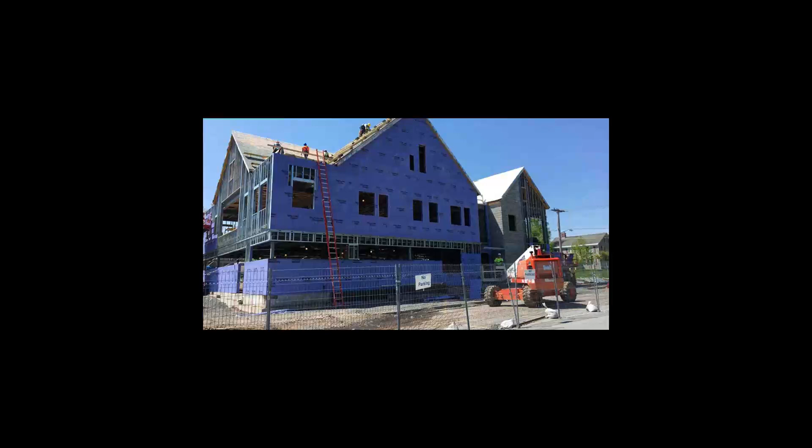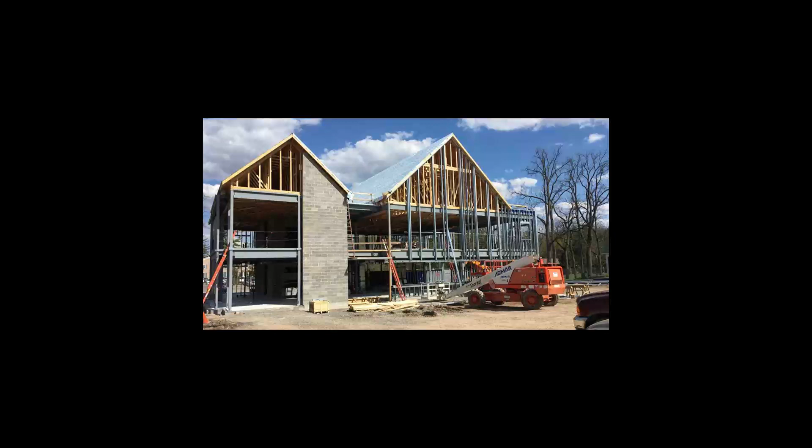Therefore, before we hear from our judges who will each present a medal award, it's my privilege to present the Special Recognition Award of Merit to the Johnson Center for Health and Wellness at Hamilton College, located in Clinton, New York. The 13,000 square foot, 2-story Johnson Center for Health and Wellness features a variety of structural systems. The 3 steeply pitched roof gables and slate shingles are supported by prefabricated wood trusses spanning between structural steel support lines. The second floor and a portion of the first floor are supported by conventional concrete slab-on-deck construction with steel beams and columns.

The selection of the lateral load-resisting system was important because of the architectural desire for the system to not inhibit the space in any way. It was decided that 3 individual shear towers would encompass the 2 stair shafts and the single elevator shaft. However, all the shafts were located towards the northern end of the building, which is not ideal for overall building torsional rotation during a windstorm or seismic event. The lateral load-resisting system had to be rigid enough to prevent excessive building torsion, as well as be a cost-effective solution. Therefore, the design team settled on CMU shear walls to surround the 2 stairs and single elevator. The system was supplemented by steel moment frames at the southern end of the building.

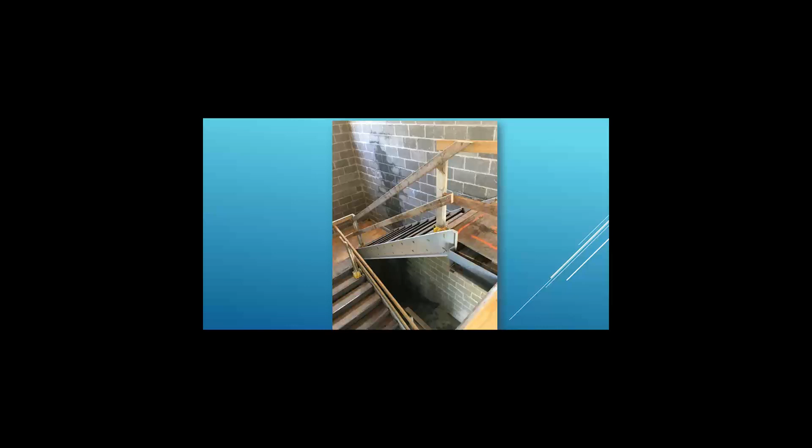The basement level houses the large mechanical units necessary to serve the building. Because of a high water table and the constant presence of underground water flow at the site, a dedicated under-slab drainage system was needed. The general contractor, Gaetano Construction Corporation, encountered an enormous amount of water flow on the site. Keeping the construction site and the building's basement dry was an achievement in itself.

The building is comprised of a shared waiting room, reception, and conference staff room that serves both the clinical suite on the first floor and counseling offices, group rooms, sunroom, and biofeedback space on the second floor. Within the clinical suite are staff offices, exam rooms, nurses station, medication room and lab, and the student-run EMT service. The first floor features radiant heating within the floor slab.

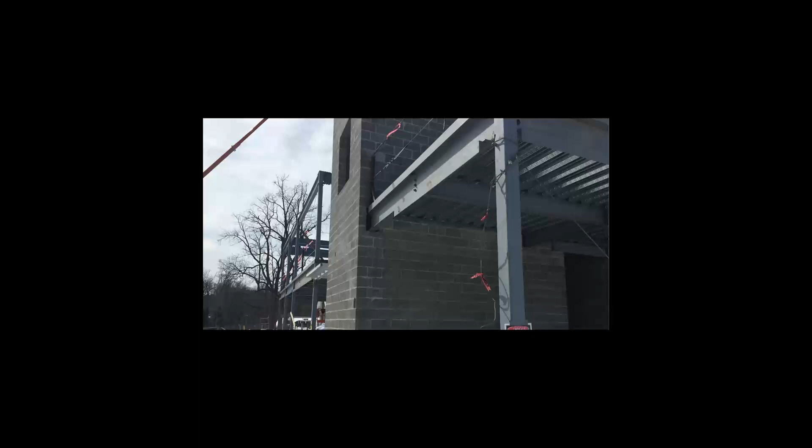The owner requested that the initial design of the building would allow for a future second story and roof gable to be built upon the southernmost part of the structure above what was originally to be a low roof. The decision on expansion was expected to come several years after the project was completed. However, much to the design team's surprise, the owner elected to proceed with the future expansion while the design drawings for the original structure were still being completed.

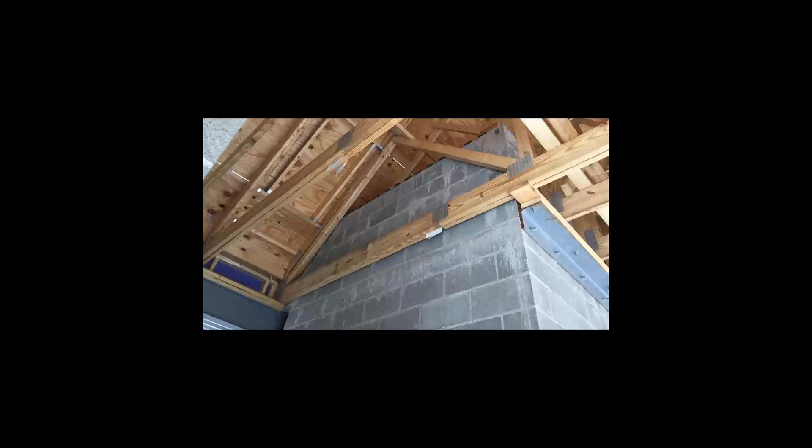This could have resulted in a significant amount of added design and detail work that may have impacted architectural aesthetic had the lateral load resisting system not been as robust as the CMU shear walls. The design team was easily able to absorb the additional load from the addition through an increase in steel reinforcement.

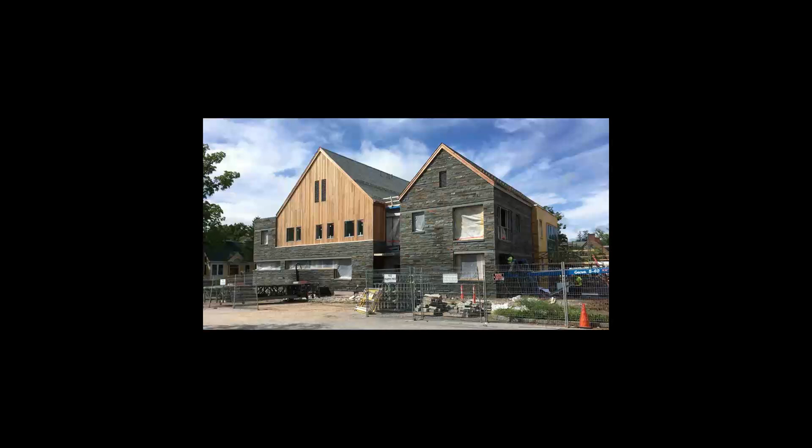The exterior facade of the building stands out as a shining example of the beauty that can be achieved with well-executed stone masonry. The hand-placed stone facade used a back bed of mortar to achieve a dry-laid look without the appearance of mortar joints. A continuous horizontal bluestone band above the typical window heads visually ties into the stone rain screen on the north facade. The Johnson Center for Health and Wellness is the archetype of a project that boasts the perfect blend of brawn and beauty achievable with masonry construction.

And at this time, I'd like to congratulate the owner and the design team on an outstanding project. The project owner is Hamilton College. Project architect is Chang O'Brien Architects. Project engineer is Ryan Biggs, Clark Davis Engineering and Surveying. General contractor was Charles A. Gaetano Construction Corporation. Masonry contractor, Paragon Masonry. The masonry producer, Rosselli Northern. The testing company and special inspector, both Atlantic Testing Laboratories, and the stone installer was Schneid Construction Company. Again, congratulations to all involved in this outstanding project.

Now, I'm going to move things along here, and it's time to turn things over to Mr. Michael Bosak to present our Bronze Award winner. So, Michael, if you would take it away, please, and just give me the signal when you want me to change slides. All right, thank you, Nick.

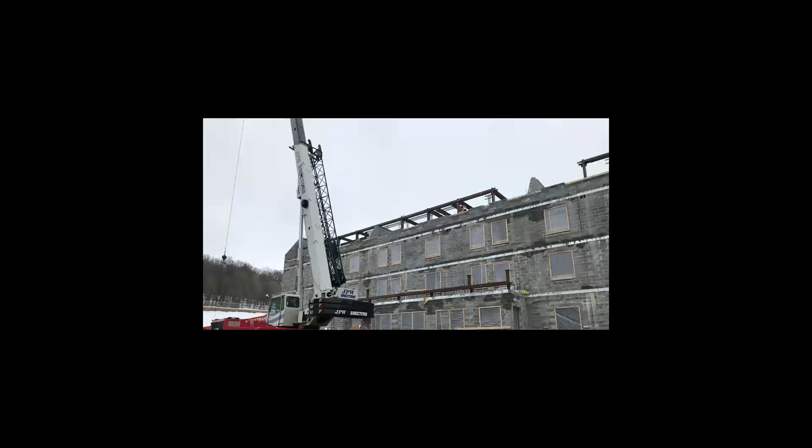I'm pleased to award the ACI Central New York Chapter Bronze Award for Burke Hall and Pinchin Residence Halls at Colgate University. Next slide, Nick. Okay. Congratulations to the team at Alliance Masonry, Jason Miner with Colgate University, for another award-winning project at Colgate University.

The pair of residence halls, Burke Hall and Pinchin Hall at Colgate University in Hamilton, New York, each house 106 students in double rooms. They occupy a prominent site at the southern edge of Colgate's Hilltop campus, inserted between existing residence halls. Negotiating a steep change in grade, each building offers two sets of entrances, a lobby to the north and a first floor commons that opens up to the new quad.

The materials, which were locally quarried bluestone and cast stone, accent the facade detailing. Most of the 45,000 CMU were installed in wintertime, which required additional quality control and extensive protection, not to mention the 2,200 pieces of cast stone, which created some rigging and installation challenges to overcome. Burke and Pinchin Halls achieved LEED Gold certification.

The 30,000 square foot stone exterior of these two buildings was sourced locally from Pennsylvania, which reflects Colgate's historic architecture, representing the character of the 200-year-old institution. You can change the slides, Nick. There's some more views of the winter construction. Another slide. That again shows the complexity of wintertime construction and trying to keep things flowing on the hills of Colgate University.

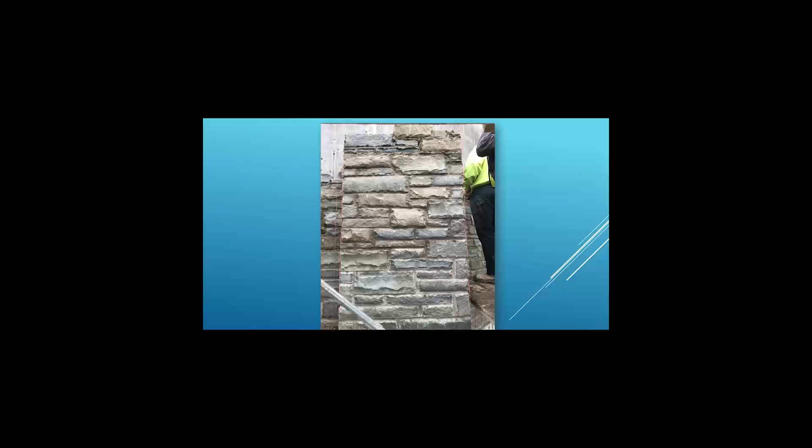Silver Award. Congratulations again to Brett Sherman with Alliance Masonry, Jason Miner of Colgate University, architects Robert A.M. Stern; the engineer was Thornton Tomasetti. The general contractor was Hayner Hoyt Corp. The masonry contractor, like I said, was Alliance Masonry. And the masonry producer was Oneonta Block Company. Congratulations again, guys, on a good job. That's it, Nick. Thank you.

All right. Thank you very much. And now, I know the suspense is killing everyone. To present the Gold Award, Mr. James Deloisio. Jim, it's all yours. Take it away.

Okay, thanks, Nick. And I gotta say, the three judges, and it was fun to be a judge, even though we couldn't actually go to the buildings. And you know, Nick promised us lunch, and he never bought us lunch or anything.

But the three judges were not of the same mind, I got to say, just full disclosure. We had some good, robust discussions about first, second, and third place, because all three projects were really quite spectacular. The first two projects, you saw the visual appeal of the ashlar masonry and the brick and the arches was really compelling. So it's tough. It's tough being a judge with three really nice buildings.

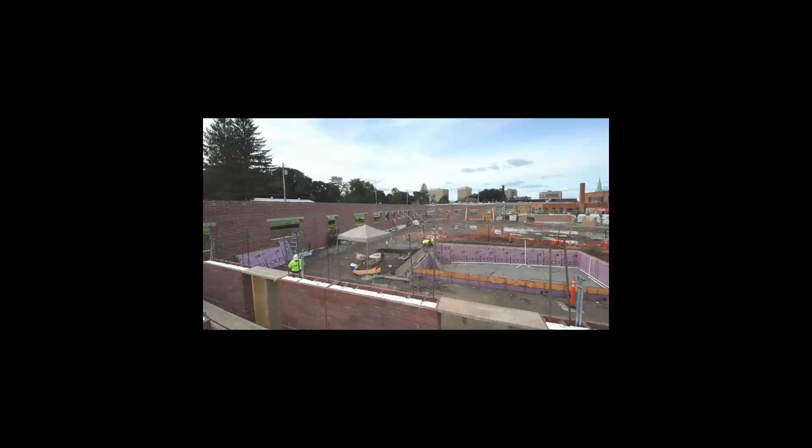Okay, Nick. Next slide, please. It's coming. There's a little bit of a delay. Sorry, Jim. That's okay. I'll be patient.

First of all, the design team laid out the building with an automatic masonry layout program called Masonry IQ. Now, I had never heard of Masonry IQ before, and that's one of the benefits of being a judge. You get to read up and learn about stuff. Masonry IQ is now a Revit add-on program that works with Revit.

What it does is it takes the modularity of the masonry units and optimizes the layout and helps you easily modify the dimensions. Don't you wish that you could have just shaved 3 or 4 inches off of a building so that the modular units of masonry could have come out well? Well, Masonry IQ really helps you do that. So check it out.

It was like a 2-minute long free YouTube video that shows what it's about. It's really cool. That's the way to design and lay out masonry buildings in the 21st century, right? The other thing is, right off the get-go, it was a special building.

It won a place in my heart because it used single web blocks, ASTM C90 concrete masonry unit blocks for the foundation walls. Single web blocks. Now, you don't need 3 webs on a block. You don't even need 2 webs. You can use 1 web. It's easier to install because you can install them around the reinforcing. There's less obstacles. You can let the grout flow better.

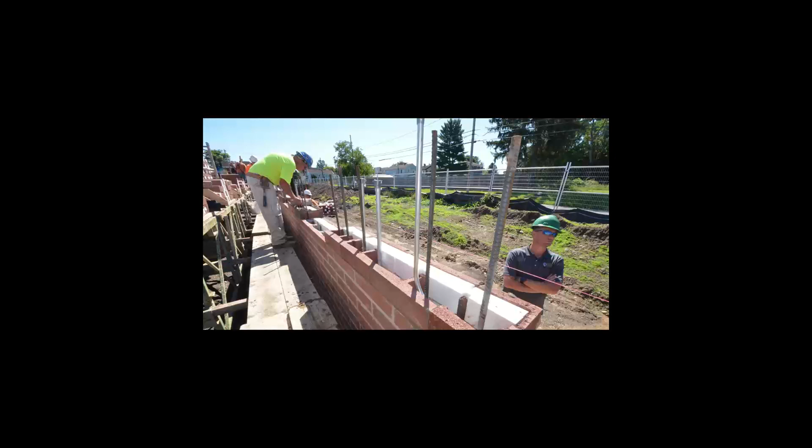And then we got to the above grade walls. And what they did is they used proprietary high R H-spec brick units. You can see the brick units with the brick webs connecting the inside and the outside face shells. And you can see continuous white insulation that looks like EPS to me. So it's decent insulation. And then you've got the vertical reinforcing. And so you put in the grout and you've got a solid masonry wall. And you're basically done. It's a one and done kind of a thing.

So they've got 12-inch thick insulated units, and they use lightweight grout with insulation. And the actual units have an overall R value. The word effective R value is misused, but in this case, you truly get an R 12.1 and R 15.5. But of course, we're talking U factor. It's the thermal flow. A U of 0.082 and a U of 0.065. We got to eventually learn to start talking U factors.

I'm just saying. So those U factors of the entire masonry assembly were code compliant and high thermal walls. So you had the conductive resistance in the wall from the get-go as soon as you built it, and you have an inherent air barrier as well. We've seen the plastic and the spray material and different options for air barriers. A solid grouted masonry wall is an inherent air barrier. So you've got the conductive resistance, the convective resistance, and the thermal mass all working for you to have a high performance thermal envelope. Plus, it's the structure.

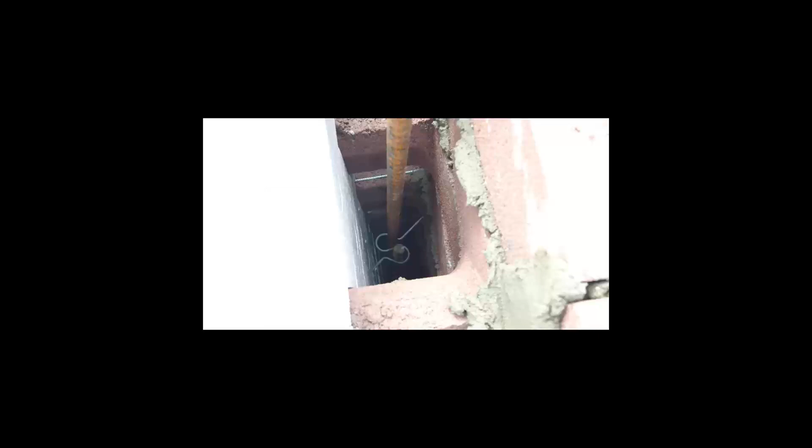So as a structural engineer that knows building envelope performance, I like this building because these walls do both of those things. And there's more. They do that and more. I sound like a Ronco salesperson, but there's a lot of things that these walls do. Let's go into the next slide. I just like this slide because those rebars are tied in nicely and they're not going to go anyplace. Nice open, clean space to put in grout.

So the walls are structural. They're thermal envelope. And they also have the interior and the exterior finishes. And of course, masonry is inherently fire resistant. And if you get the electrical, plumbing and mechanical trades in early enough, and you have to get them in to coordinate anyway, you can put the conduits and the pipes in the walls before the walls are built and the grout is placed. So by the time the grout is placed, you've got an all-in-one wall system. Okay, let's go to the next slide, Nick.

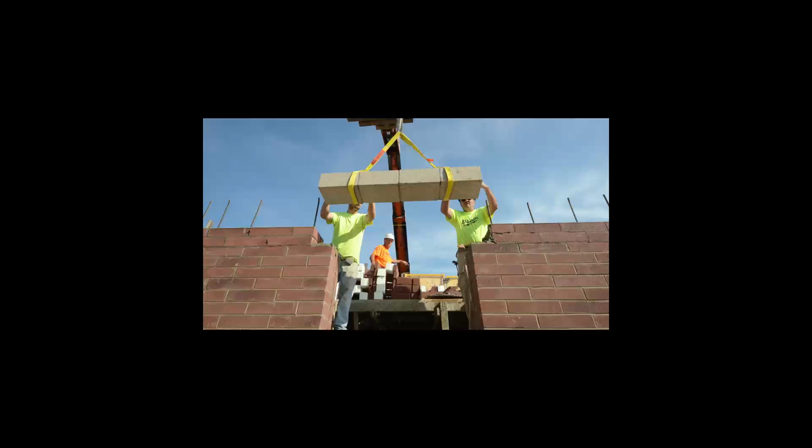And the lintels were pre-designed, prefabricated, reinforced with carbon fiber strips, and then set into place, and then rebar put in, and grout put in. Why would we use steel lintels that you have to flash and make sure are galvanized or corrosion protected, and have different thermal properties in the masonry, when masonry works as a fine lintel system itself? So let's go to the next slide.

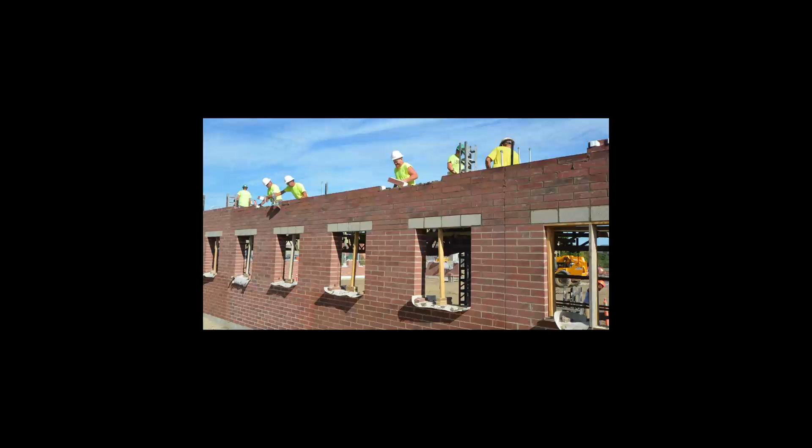And I like this. You got the masons. Look at the smile on the mason's face, right? The production was very good on these walls, and once they got the masonry units installed, all they had to do was cleaning of the faces, and you've got the finished wall. There was a lesson learned about keeping up with the cleaning, because every single face on these wall systems was exposed.

The exterior, so you can see the brick appearance on the outside. The edges of the windows and the doors were brick. And also, as you'll see in a couple of slides, the interiors were exposed masonry as well. There's nothing wrong with gypsum drywall and paint and wallpaper, but isn't it nice to see masonry on both the inside and the outside?

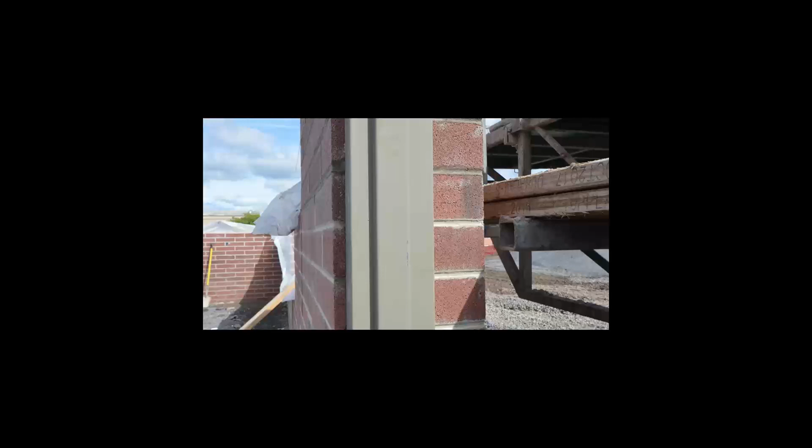So let's take a look at some of these slides. The next slide, Nick. Yeah, that's the edge. So when you think about it, every single mortar joint that the masons created on this building was exposed, except for a little bit behind the door jamb. But the level of workmanship seems to be pretty high.

Again, I'm really sorry that we weren't able to go out and see it this year, but the pride of workmanship of the masons, when they know that every joint is going to be exposed and none of it is going to be covered up by sheetrock or anything, is, I think, compelling to get a good quality project. Okay, let's go to the next slide.

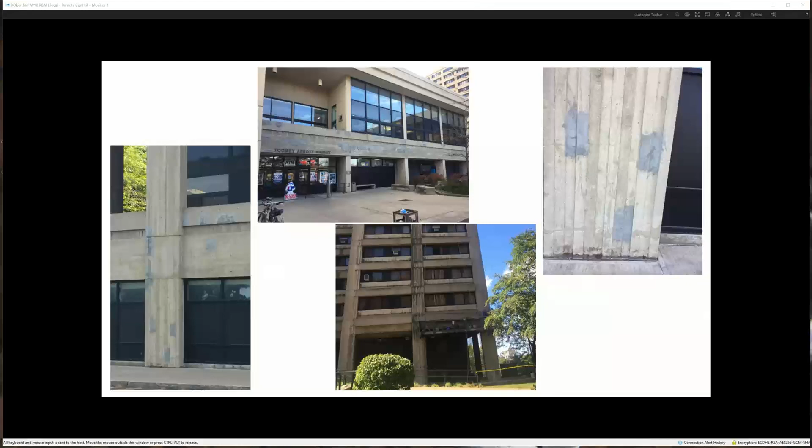As part of the design phase, as I said, Vertical Access came in, and over the course of 4 days, they were able to get their hands on the entire facade of the building. Not only did they do the inspection and sounding, but they were able to do select removals where there was loose concrete that presented a concern to the inhabitants of the structure. In addition, we took a couple of concrete cores and did some concrete analysis. We did air volume testing of the existing concrete, as well as petrographic analysis for carbonation.

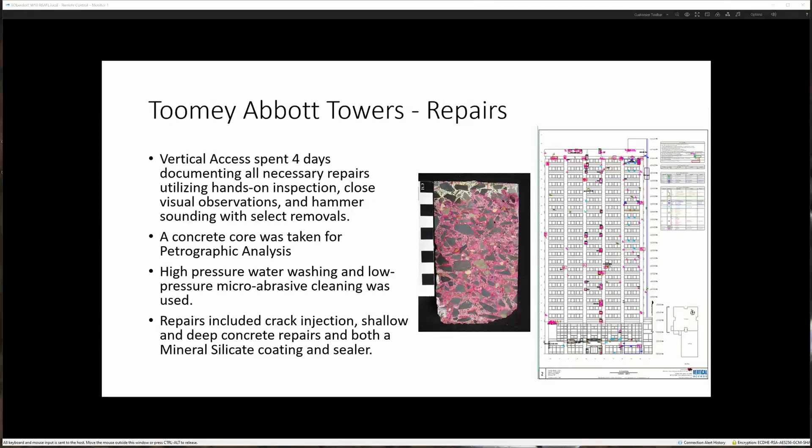In the beginning portion of the project, we did a high pressure water wash, and then in areas of difficult staining, we did some micro abrasive cleaning. Then the repairs themselves included crack injection, both shallow and deep concrete repairs, and we finished with both a mineral silicate coating and sealer to bring more consistency to the overall appearance of the building. Even with the best matched patches, sometimes it's still very obvious that the building's been patched, and by coating the building, we were able to give it a far more consistent appearance.

A lot of the deterioration on this building was a direct result of poor concrete cover and the carbonation of the structure over the age. The reality is that the carbonation in this particular building didn't really exceed much past an inch, which for a building of this age is pretty good. But unfortunately, when you don't maintain good concrete cover, it doesn't take a lot of carbonation to start the deterioration process and the carbonation and rusting of your reinforcing.

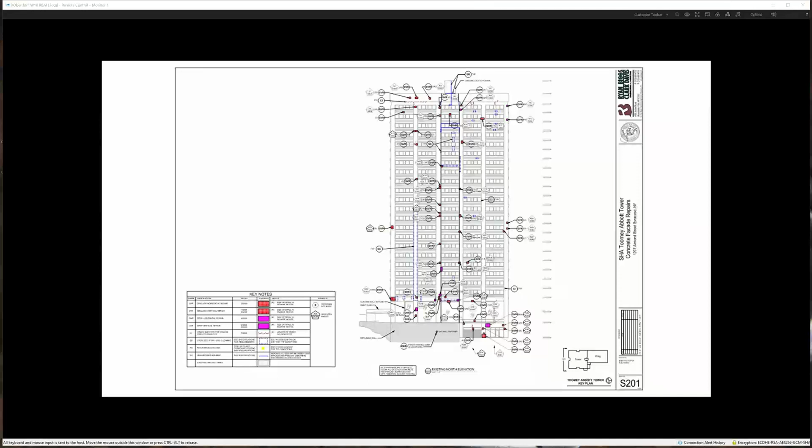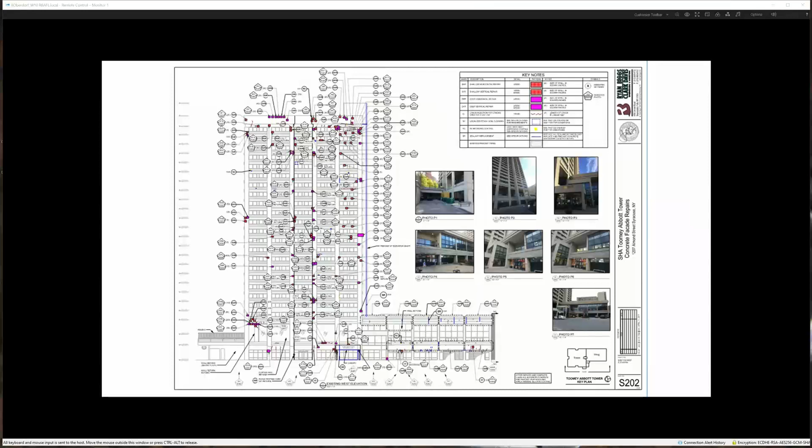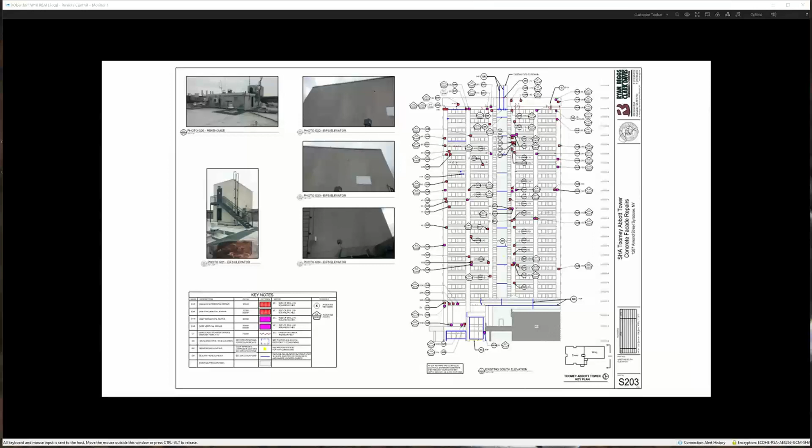So here's just a couple of shots of the drawings that we put together for the bid documents. You can see through these elevations just what we were dealing with. There are repairs all over this building from the top to the bottom, and obviously being a 24-story tower, access to the structure was quite difficult. And the building is fully occupied by the housing authority and had to maintain access throughout the project while we were removing concrete over entries and everything.

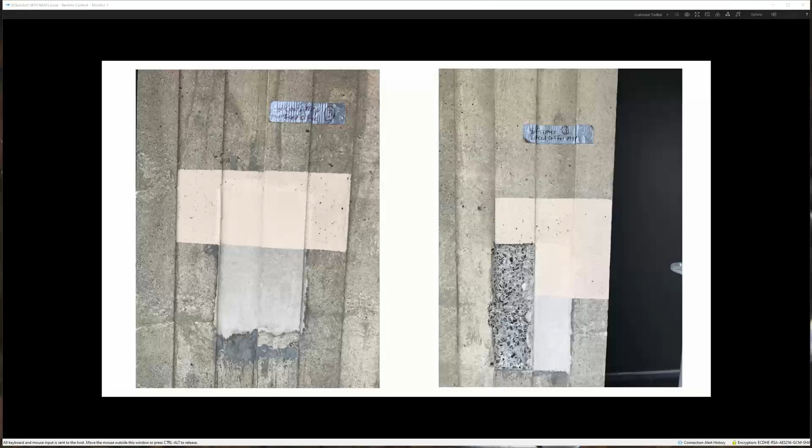So working with the design team, the owner, and Lupini Construction, the contractor on the project, we were able to do a number of pre-construction mock-ups that I think were crucial to getting this project done in the manner that it was and looking as good as it is when it's complete.

We were able to use a couple of different repair mortars, a couple of different stains, mock all these things up. The owner was very patient throughout this process. They wanted it done right, and I think through that process we were able to get the right products to give the owner a really good look at the end of the project.

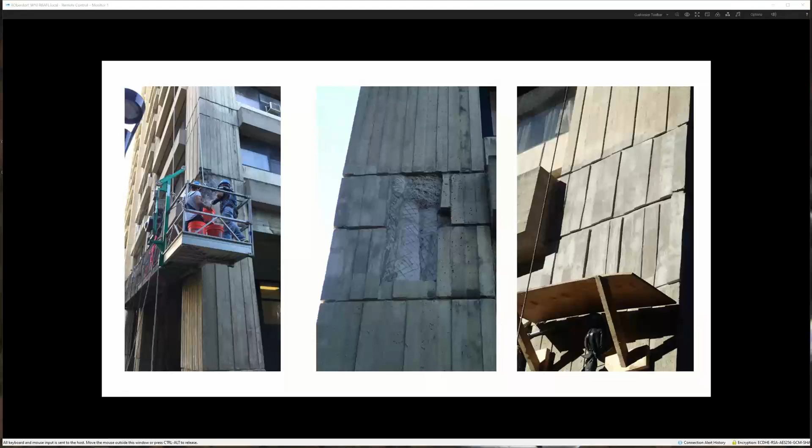So as I said, this building is board formed, and it's obviously a really important architectural component of this building. To have lost any of that through our repairs really would have been to do the building an injustice. And Lupini's guys were great throughout this process. A lot of these were very deep repairs that required building out the repair mortar. They did everything by the book with the materials that we were able to select.

And as you can see, they took great care in the work they were doing, which in a restoration project like this is incredibly important. Anybody can put a repair mortar on a building, but the care these guys took to match the architectural aspects of this facade really made the project pop in the end.

And as I said, 24 stories, they were on this building a long time, and I can see where, after a certain point in time, the amount of effort that they put in would have worn on them, but they maintained this level of workmanship throughout the building. So you can see some of the different aspects of the process here that they went through, removing the deteriorated concrete, cleaning all the patched areas, coating all the existing rebar, building out the patches, trying to match the finishes as best as possible.

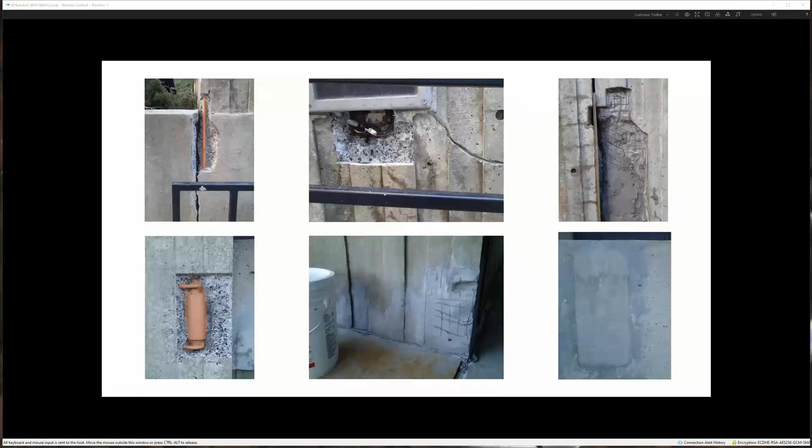The work on this building had to be done in individual drops. Obviously, they couldn't be moving back and forth and do it efficiently. So when one drop of repairs was completed, they came right in afterwards and coated the building. See the drastic contrast from what we started with to what we finished with. And as you can see, the difference is night and day.

So at the end of the project, we went from a drab, dreary, dirty concrete tower to a building that I think we really brought back to life from a visual standpoint and from a structural stability standpoint. We've addressed all of the deterioration issues that were present, and by using a mineral silicate stain and sealer, we've sealed away the building from future deterioration, at least for the foreseeable future, until again the building is going to require some additional maintenance.

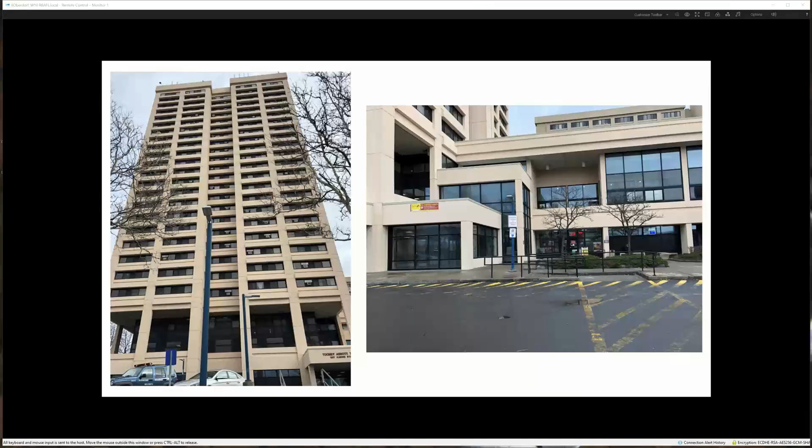But I think at the end of the day, the big story on this project was just how well the team collaborated to get it from start to finish in as smooth a manner as is possible. And again, the team on this one was William Taylor Architects. Lupini Construction was the contractor, we used Vertical Access for the building assessment, and the project was for the Syracuse Housing Authority.

All right, great. Thank you very much, Kyle. I can hear the claps from everybody just virtually, I guess. Like you say, everybody does recognize that building, so that's pretty cool. All the projects were pretty impressive. Thank you to the judges for presenting them. Nick, you have a little something to talk about here with you guys?

Yeah, very briefly, I just want to take the opportunity to sincerely thank all the judges for masonry. Mike Bosak, Scott Lupini, Jim Deloisio, thanks very much for your patience and your endurance over the course of the year. In the spirit of be careful what you wish for, Jim, you just might get it. Maybe we can keep the band together for the next round of awards, and I'll take you out to that lunch. I'll wait for an answer on that one.

But I also want to specifically and especially thank Scott and Lori Lupini for sharing their conference room with me today, as well as their internet. Made it a much better experience than on my feeble connection. Trust me. With that, Greg, that's pretty much all I have. Throw it back to you for any closing words.